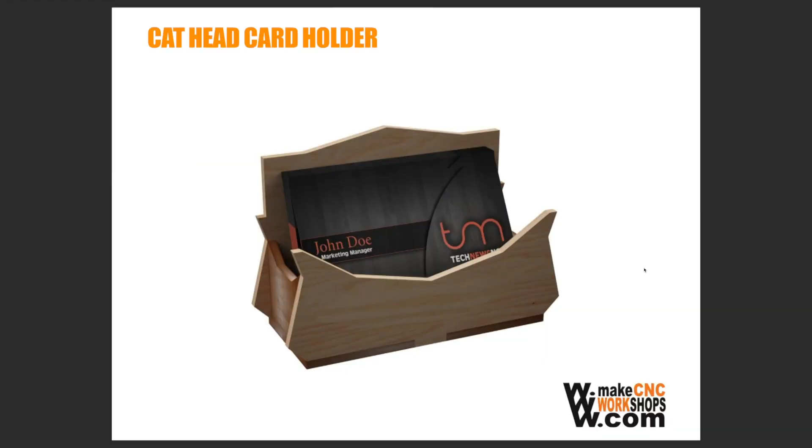Today I wanted to go over how to create the MakeCNC.com cat head business card holder. We've done a tutorial on how to do this within Vectric software, such as Cut2D or VCarve Pro. But we haven't really delved into how to do so in Fusion 360, and that's what I wanted to cover today.

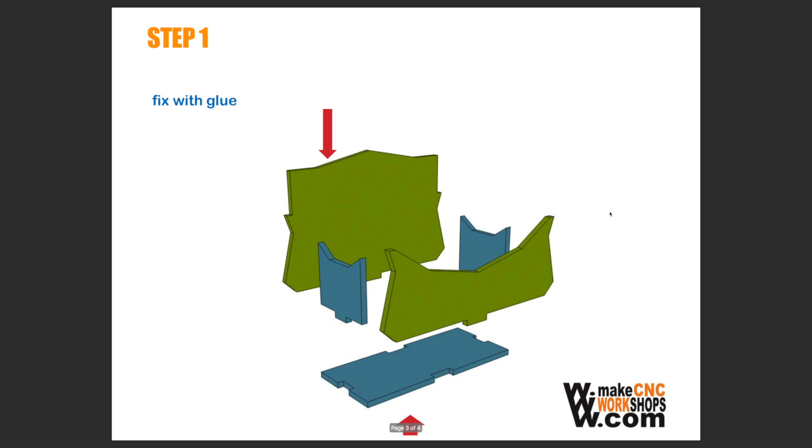This is the PDF that comes with the project itself, and you can download it in a .dxf format, which is what we'll be using. So you can see here we have the parts list, the instructions, and what the final project will look like.

Now before we dive right into our CAM, I just wanted to quickly cover the inside corners. These are 90-degree angles. Now that's an issue because if you've used a CNC machine before, you realize that all the tooling is round. And the solution to that is what we like to call Dogbone fillets. Dogbone fillets, because of how they're recessed into the piece, allow for a perfect edge-to-edge fit, whereas a normal fillet would leave a curved radius.

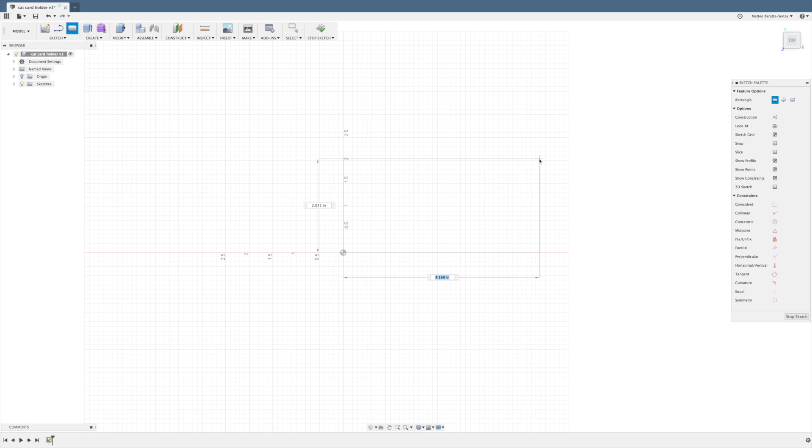So let's begin our file creation in Fusion 360. Now we want to begin by actually making the dimensions of the stock we're going to be using. And we can do that by creating a sketch, selecting our plane. We've moved to our top face. And I like to use a little shortcut. You can hit S and you have all your shortcuts here. I like to use a 2-point rectangle. This allows me to start with the bottom left corner at the very center of our coordinates.

So we can move out. We want it to be 12 inches in length by 6 inches in height. Now I actually made this 8 inches. I wanted to give myself an inch on each side for the clamp hold downs that come with our D-series machines. They're a great work holding solution. They allow you to do a lot of stuff right out of the box, and I wanted to incorporate them into this project. So I gave an extra inch on each side so that there'd be enough room for the tool to cut its project out. So once we have our dimensions, here's our stock.

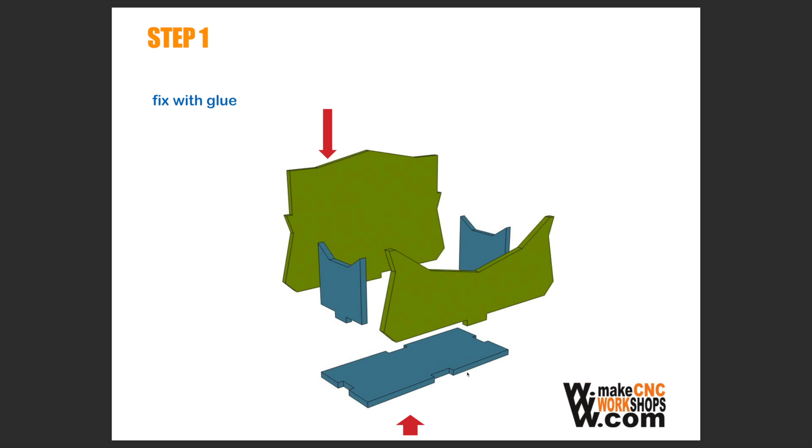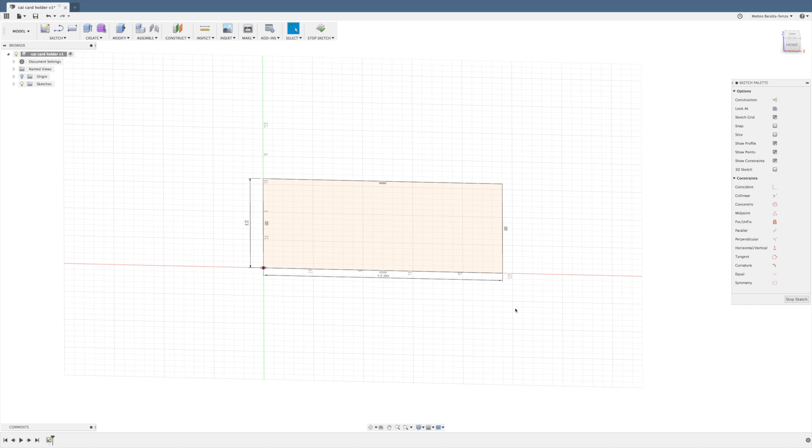Now there's something very important to remember when you are creating a project like this, where this piece is vertical and it slips into this little notch which is horizontal. The thickness of your stock is going to dictate how well this piece and this piece fit together. So it's very important to measure your stock. Now, if we take a pair of calipers to our stock, the example piece that I'm using is, instead of an 1/8 inch, 0.125, it is 0.124 inches thick, meaning I'm going to have to scale my project to the correct dimensions so that everything interlocks.

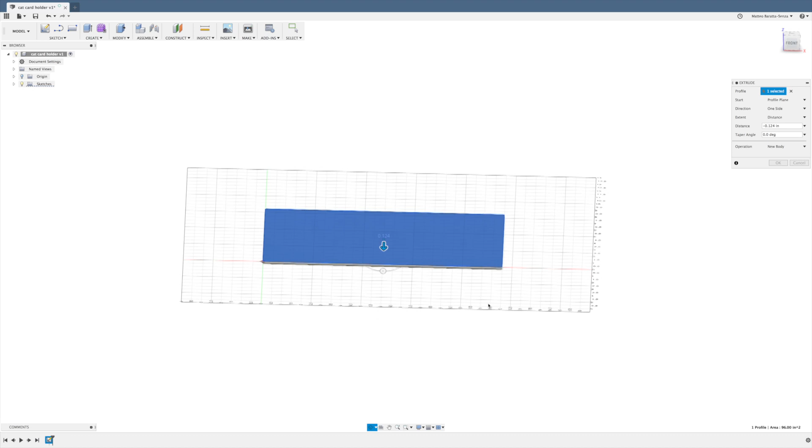To do so, I'm going to start by fully modeling my stock, and I can do that by hitting E or selecting Extrude up here, and I'm simply going to extrude it down the thickness of my stock, so 0.124. And I extrude it down so that it's easy to place my DXF file right on top. Hit enter, and as you can see, we've now created our stock. So this is essentially the material that you'd put in the machine.

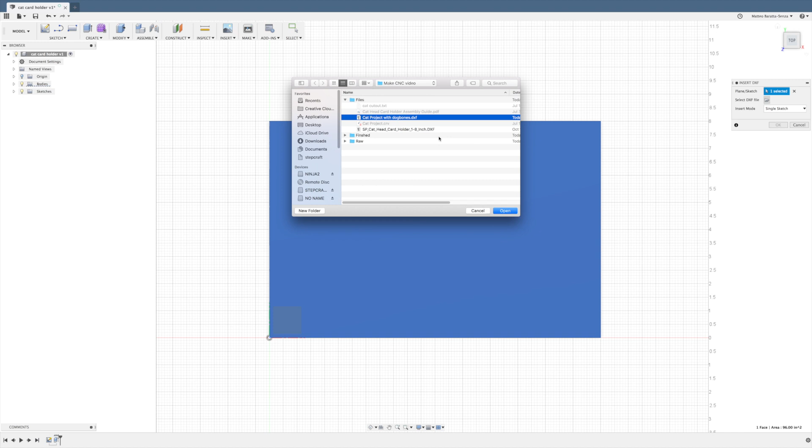Once we have our stock, we can move to our top view and select Insert, and we want to insert our DXF. Now, this DXF file that we're using for Fusion is a little bit different than the normal DXF that you would use with Vectric. As you can see, it says with dog bones, and I'll cover that in one second. So if we open that sketch, just importing, and there we go. So now we have our sketch right here, and we can actually move it around.

I'm just going to move it about an inch off the bottom, so it's sort of centered between those two pieces where I want to have that work holding. We can move it over a little bit more. That way we can almost get two projects out of this one piece of stock, which is really handy. This has been moved around so that the space is saved.

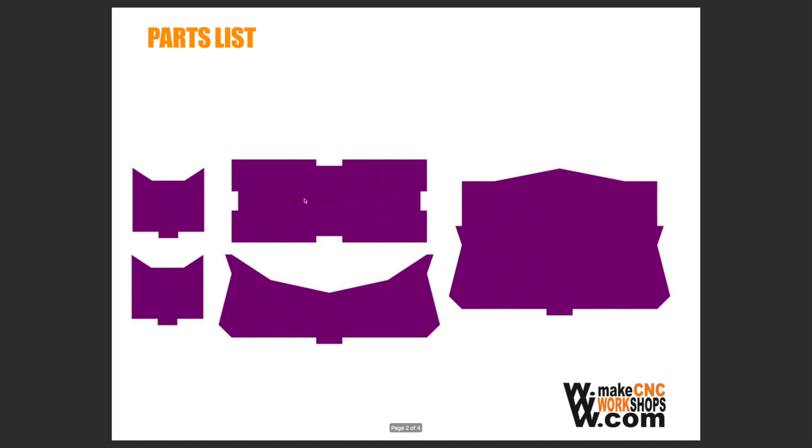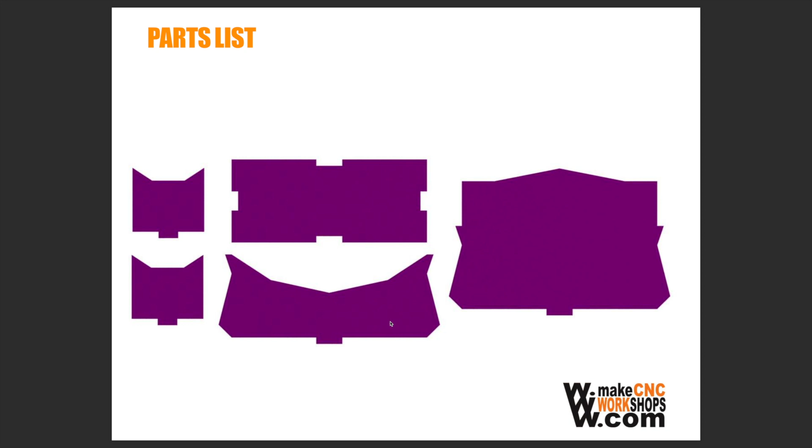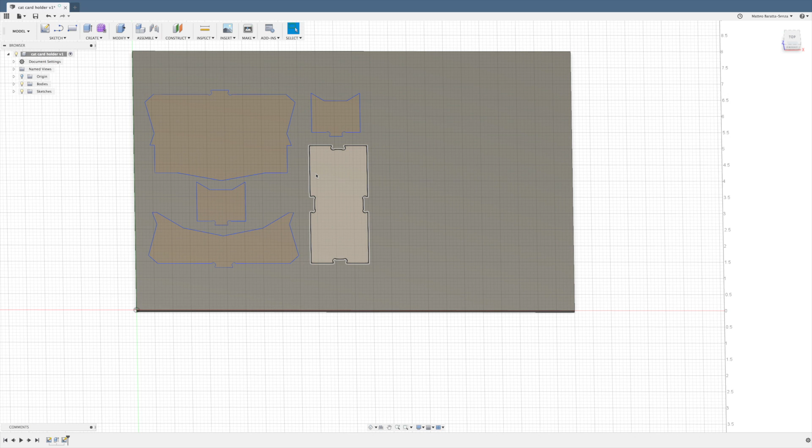You can see here in our preview, this is how the DXF imports by default when you download it from makecnc.com. And this is just fine if you have expendable stock, but by rearranging these, as long as there is a 1/8 inch distance between each piece, you can save a lot of room, as we see here. So now that this DXF is inserted, we can hit OK, and our DXF is inserted right on top of our stock there. So we have enough room there for our clamps.

Now, I wanted to quickly touch on what Dogbone fillets are. In Fusion, you are unable to create Dogbone fillets without an extension or without hand drawing them yourself, both of which defeat the purpose of an easy first project tutorial.

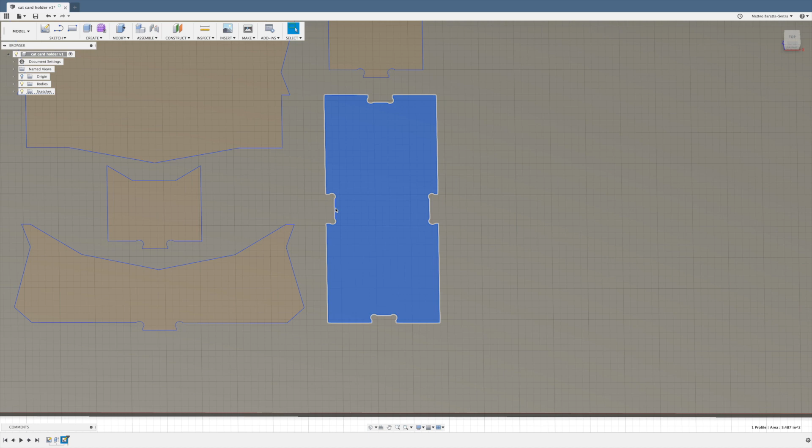So what I did was I took my DXF file from Vectric with the Dogbone fillets already made and imported it back into Fusion. We offer this modified DXF file for those of you who are using Fusion 360 to create their project. Now, before we continue, I just wanted to explain something briefly.

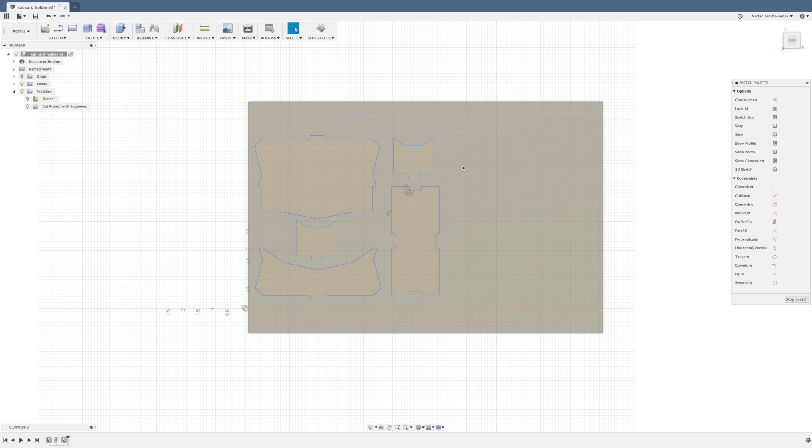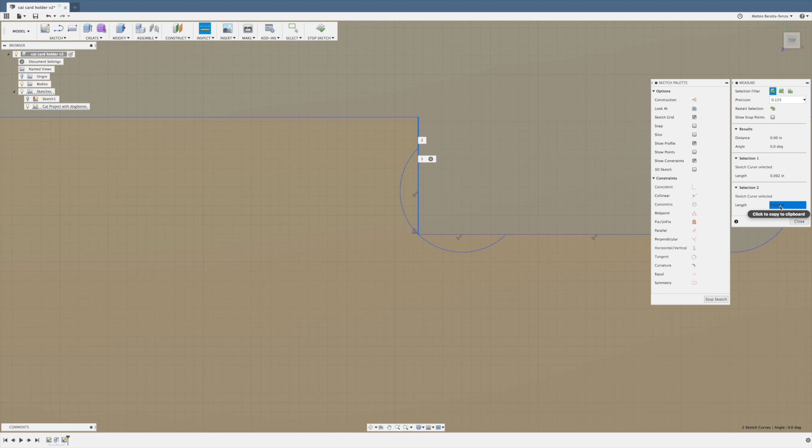If you look here, I've created this line here, as it's important to understand why we would scale a project. So if I hit I, which is inspect, and I select this line, and then I select this one, these two lines, 92 plus 33 is 125. So we can see that this length is 1/8 of an inch. It's exactly where that 90-degree angle would be without the Dogbone fillet.

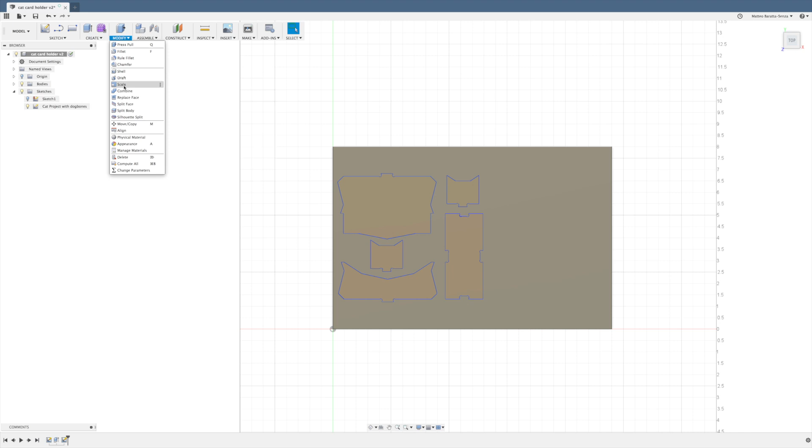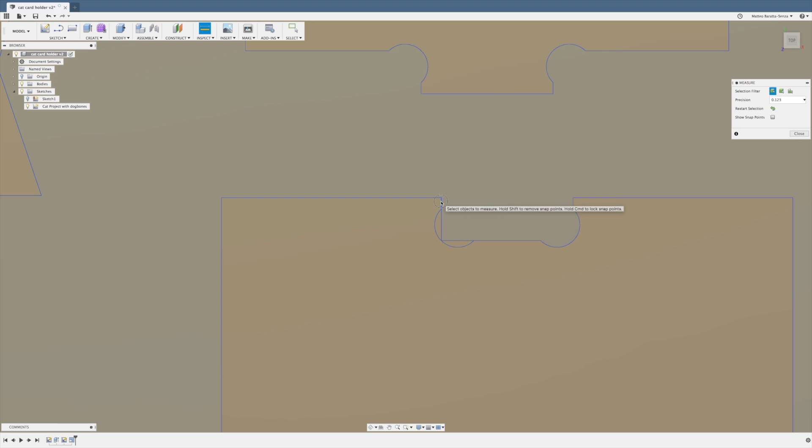So we can go ahead and scale our drawing. So select scale, and then the entities that we want to select, and we change that to 0.992. Now, if we go back to this little example that I showed and hit I and inspect these two pieces, you can see there is a 1 thou difference now, which means it would be 0.124. So now the project is scaled correctly.

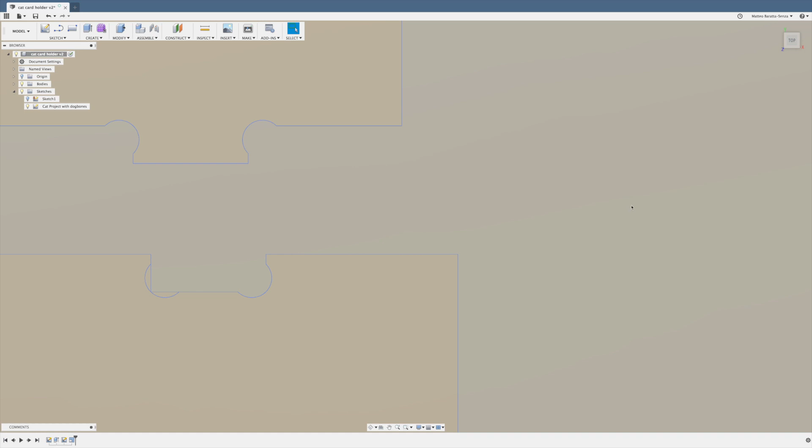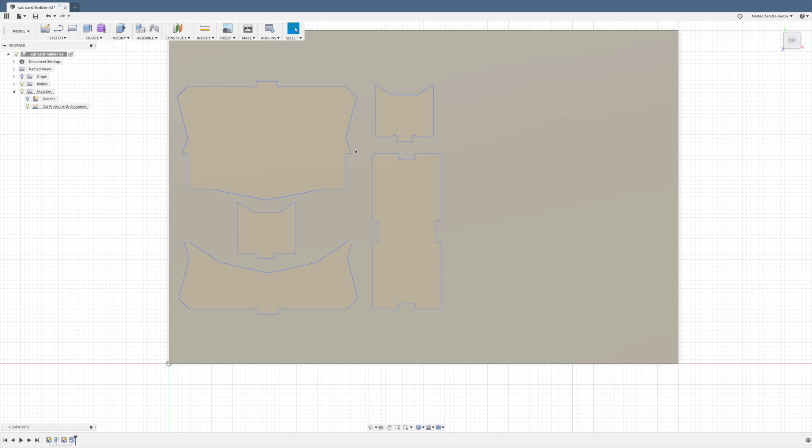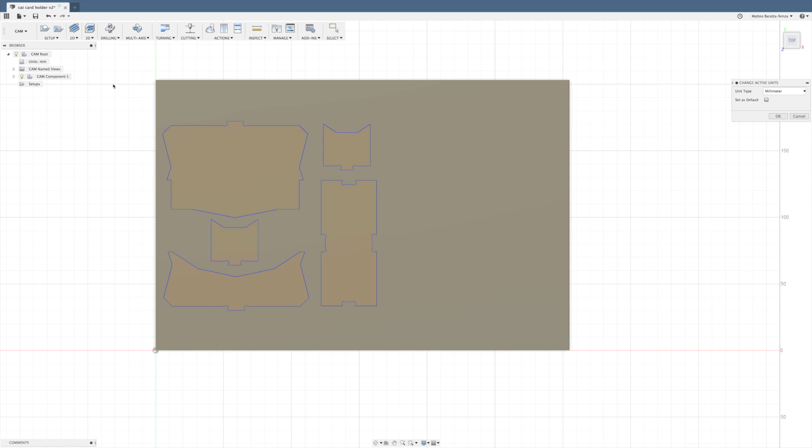In our case, our stock is pretty close. So I'm just going to clean these up really quick. There we go. So now that our project has been scaled, we are ready to run our toolpath. So to do so, we can move over to our CAM environment. Now we're in our CAM environment, and I actually want to change my unit type to inches. There we are. And we can do our setup.

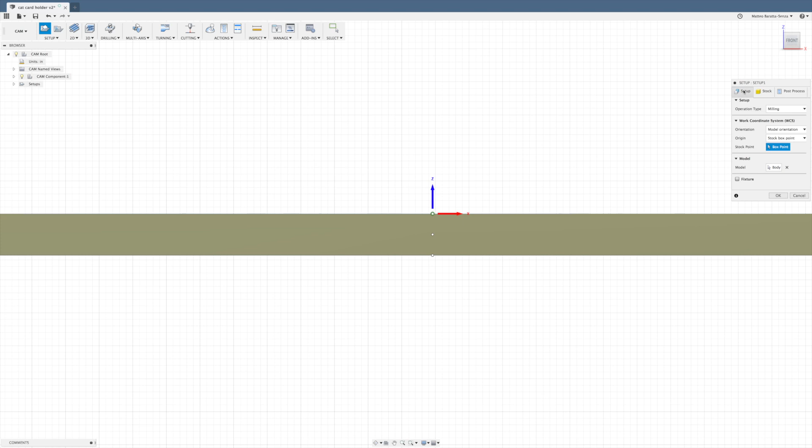So here's our setup. We have our X, our Y, and our Z. Now I like to start at the front and make sure that it's starting at the model. We have some stock, which I want to change. I do not want any additional stock. So I want our start point to be right at the top of the work. Now our setup, I want to do something a little bit different this time. I actually want our stock point to be the top.

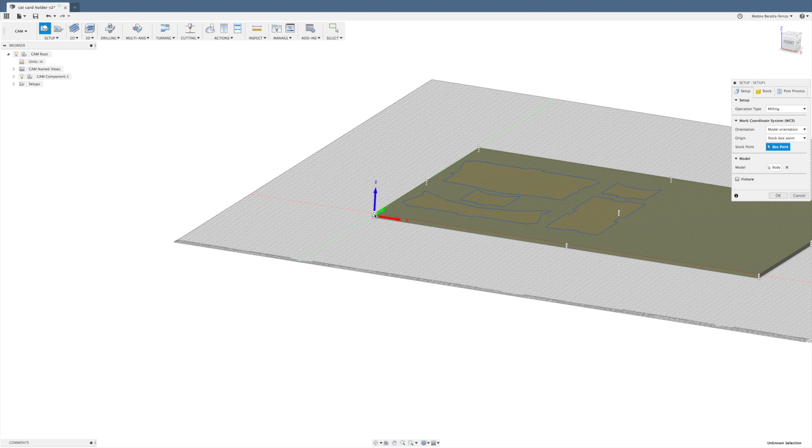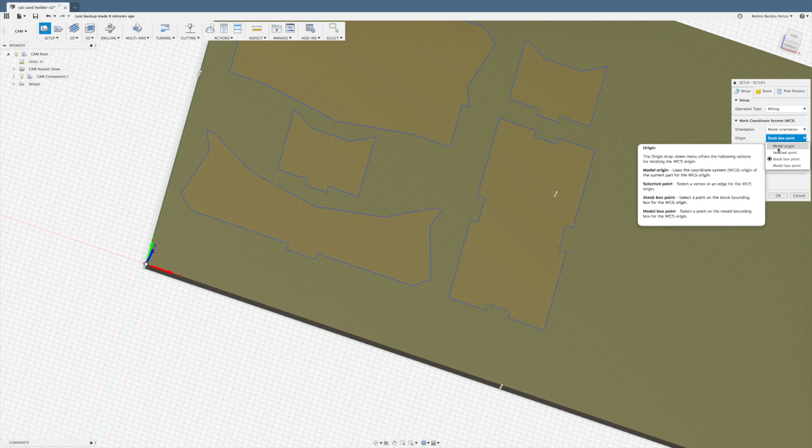There we go. So our starting position is actually at the very corner of our workpiece, right where the drawing begins. And you know what I'm actually going to do? I'm going to move that up here. And I did that just by selecting origin, selected point, and then selecting this line.

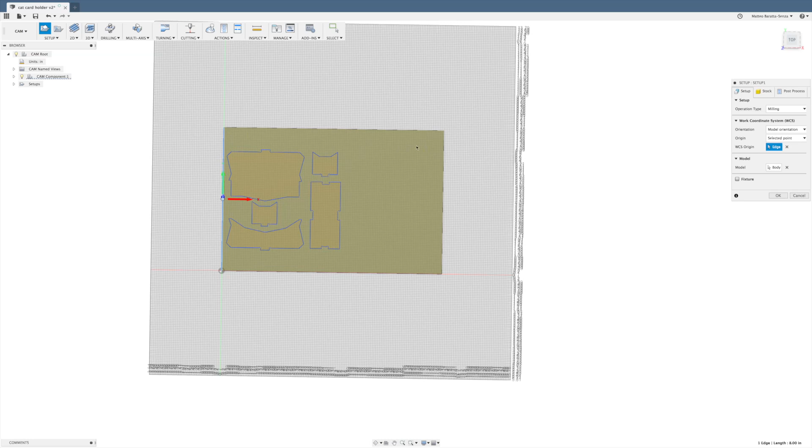And I did that because I gave that extra inch on each side for the clamping bars. And if my spindle were to start here, it would actually run into my work holding. So being conscious of your work holding when creating CAM is very important. So now our setup is complete. We can see our height in Z. That's the correct width. And we can hit OK. And our setup is done.

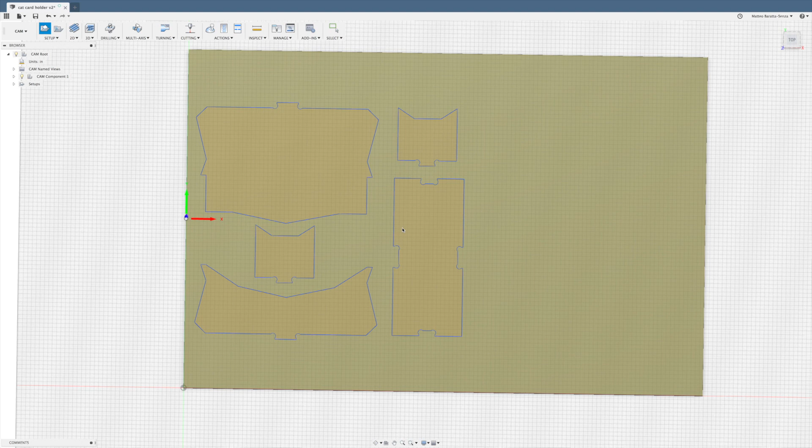So once we have our setup, we can move into doing our toolpath. So we're going to do a simple 2D contour. Select that. And now we can set up our tooling. So we select our tool. And this is one that I've created specifically for this project based on the actual tool I'll be running. Now, to create your own, simply select this icon and select the type of end mill you have and the number of flutes, and then fill out this information as applicable.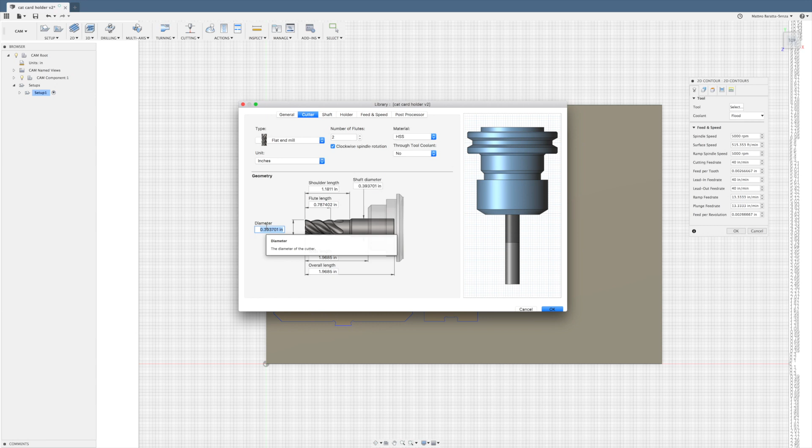Sometimes you'll have a different tool for different projects. Of course, you can build a tool library based on the tools you own personally, but these vary. The only thing that's going to be the same for everyone watching this video is the diameter, which is 1/8 of an inch. So I have this 1/8 inch end mill that I've created here, and I can select OK. You'll see it's loaded up in there.

Now, the main things that we're going to worry about is our feed rate and our spindle speed. Now, spindle speed you don't have to worry about if you have an MM1000 or a Crest spindle, something that isn't electronically controlled. If you have an HF500 and you're interfacing it with CNC to control the RPMs through the software, that's something that you'd set here, and you could set that at 12,000. Personally, I will be using an MM1000, so this is not important to me.

For those of you who are using an MM, I found the optimal setting is around 4 on the dial. Now, our cutting feed rate is going to be 26.322, and that is in inches per minute. That is about 10 millimeters per second. Now, feed per tooth is fine as it is. Our lead in and lead out feed rates, we want to keep the same. So we can actually take this value, copy, and just paste that in.

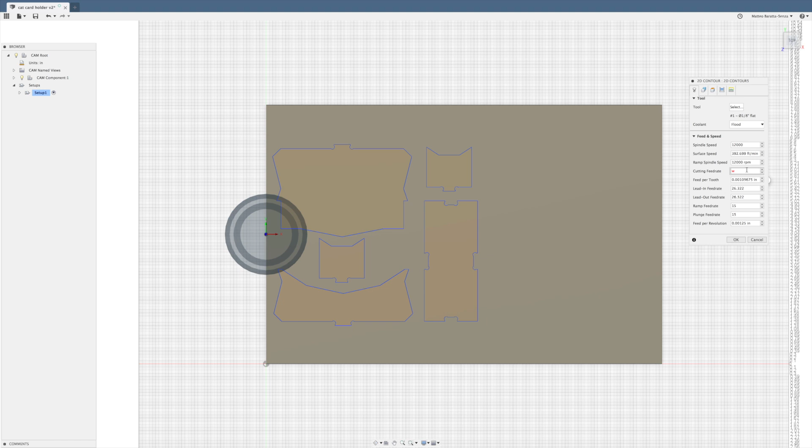Now we can move on to our geometry. So we simply select the contours that we want the bit to cut out, and then these little arrows, we actually want them on the outside of the line, as that means the bit is cutting up against the outside line as opposed to on it or inside. You'd use inside for a pocket operation. There we go. Now we want to set up some tabs.

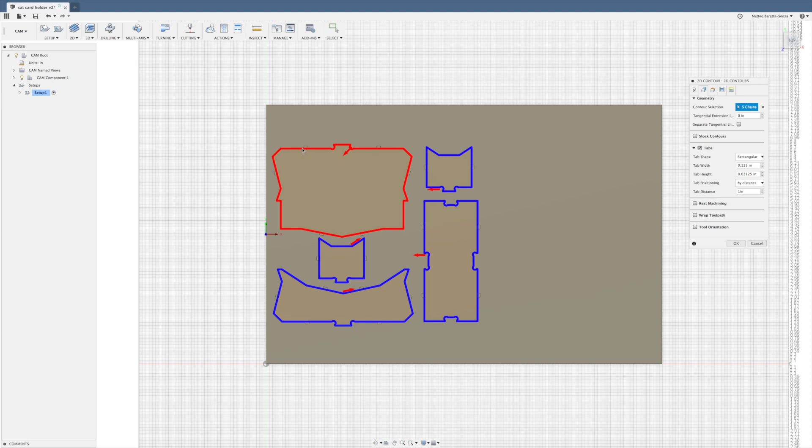Now I know this looks strange when it looks like it's inside. It's not, and you can tell that by the location of the tabs. If these were on the inside, it would be cutting the inside line. That's a nice way to check if your arrows are correct, because sometimes in situations like this, it's kind of hard to tell where it's actually cutting. It's indicating that the tool is going to travel this way and into the piece and then back out. But that's hard to tell from that view.

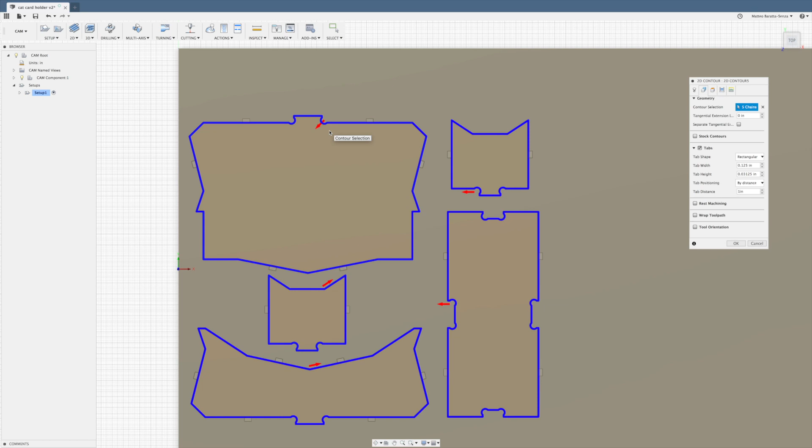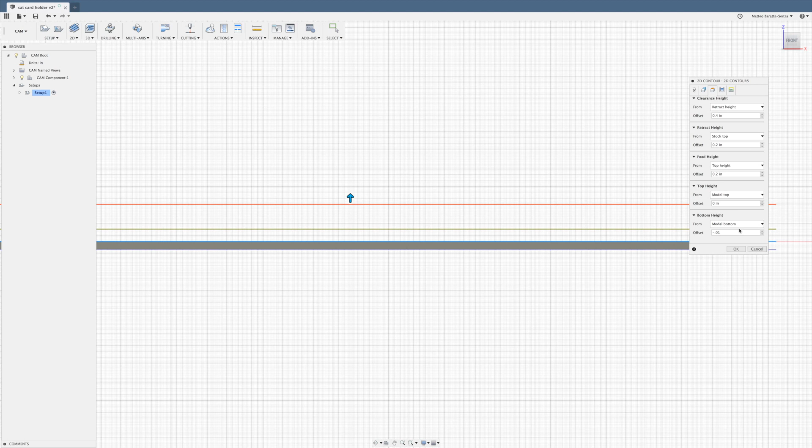So now that our tabs are set up, we can go to our heights. Now we are in the top view, but we can actually move to the front, so it's pretty easy to visualize. My top height, I want to start at the model top, and the bottom height, I want to be the model bottom. I want to give the bottom height a negative 10 thou offset, which allows the spindle to pass all the way through the piece. When doing this, just make sure you have a sacrificial board underneath, because you don't want to damage the bed of your machine as the tool is passing all the way through. Everything else should be fine.

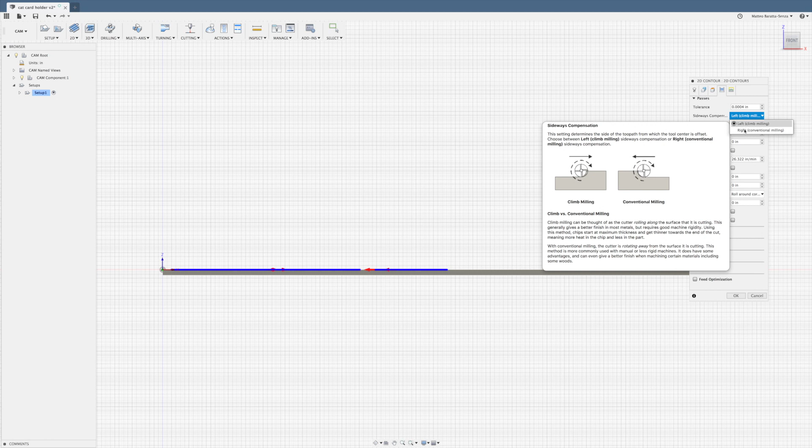Now we can go to passes. Our sideways compensation should be on conventional. Everything is fine. We don't need to do any finishing passes or anything fancy like that. We simply want to do multiple depths, and our step down should be half the diameter of our bit, so that's 0.0625. We don't need a finishing step down. Everything else is just fine the way it is.

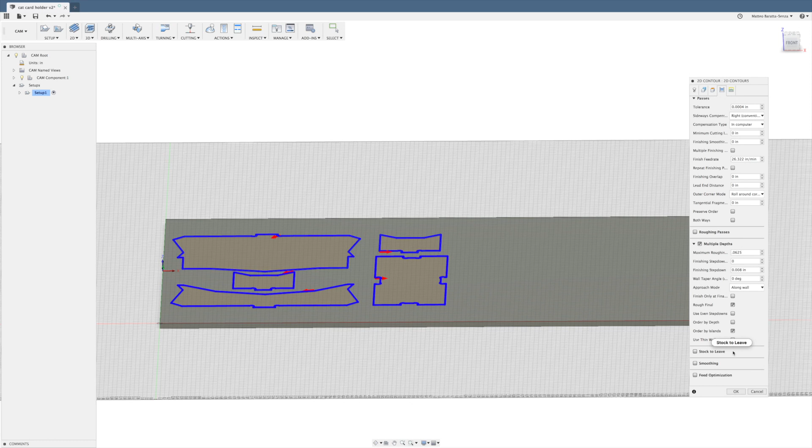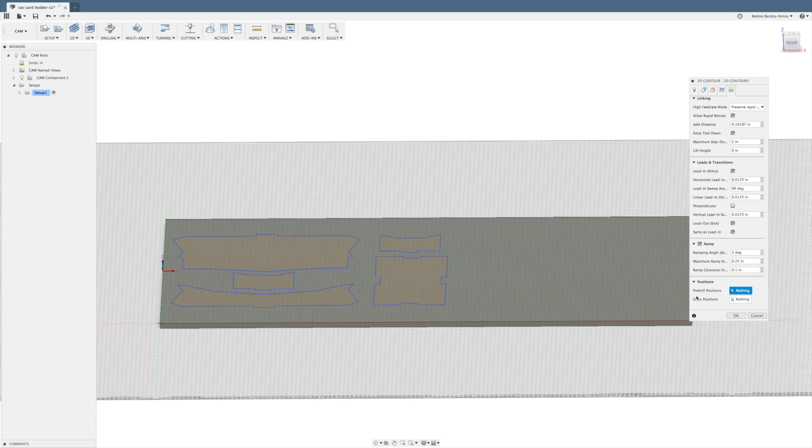We can go to linking. We want to preserve rapid movement, allow rapid retract. We can keep the tool down as much as possible. And for our lead-ins and transitions, we can keep it as is. We can add a ramp, and this is useful because instead of just plunging directly in, it will do a sort of ramp in, and that puts less stress on the tool and on the machine. So once we've done all that, we can hit OK, and it's going to render our toolpath.

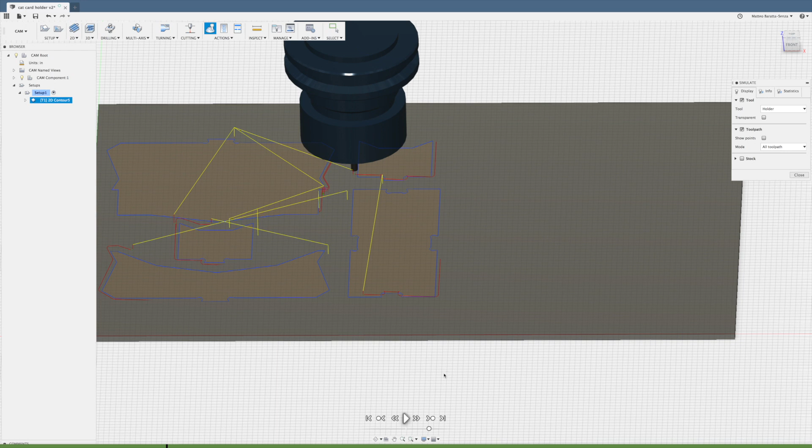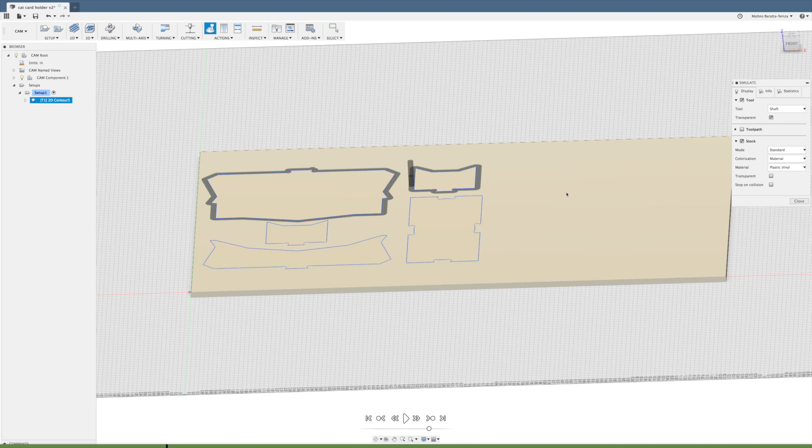So now that this is all rendered, we can actually simulate and see how that works. Now when I do a simulation, I like to make my tool transparent and just show the shaft of the tool. I like to turn my toolpath off, and I actually like to turn my stock on and to plastic vinyl. It helps kind of visualize the cutting operation here. And lastly, I like to turn my CAM component off, as you get to see the actual workpiece as opposed to your model showing through as you cut.

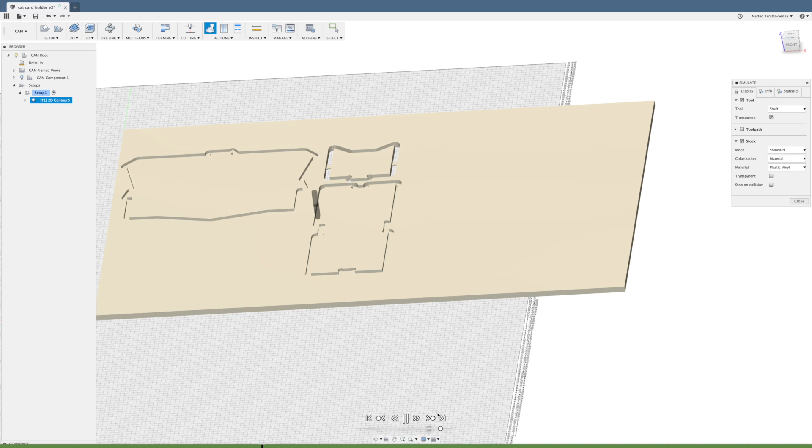Run that simulation. We can speed it up if we want to, make it a little easier to see. You can see it's cutting those tabs. On that last pass, it's keeping that material there. And it's all done. Now that we're all done with our toolpath and we've simulated it and everything is to our liking, we can do our post-process.

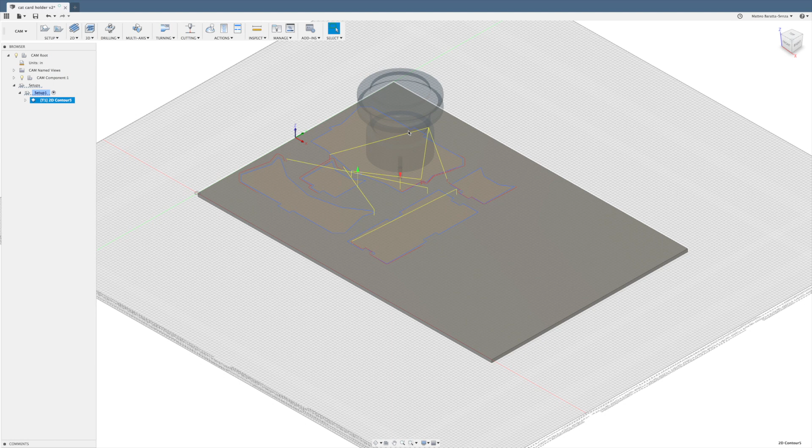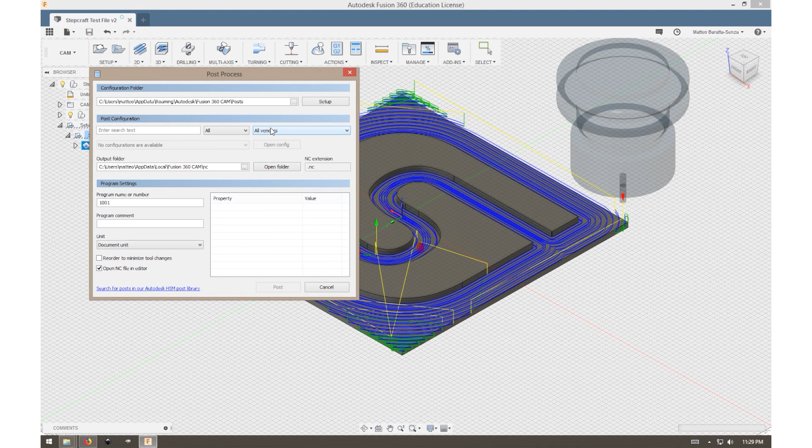Now to make this process a little bit simpler, we can go back to Fusion 360, and in our post-process, we can select Setup and use a personal post-process. This will allow us to copy this file location and paste it into the download, allowing that .cps file to go directly into our personal post-processor folder. Now, it will not appear by default. You'll actually want to cancel your post-process and reselect it. Then go to Setup and Personal Post Library, and we should have our STEPCRAFT post processor appear by default.

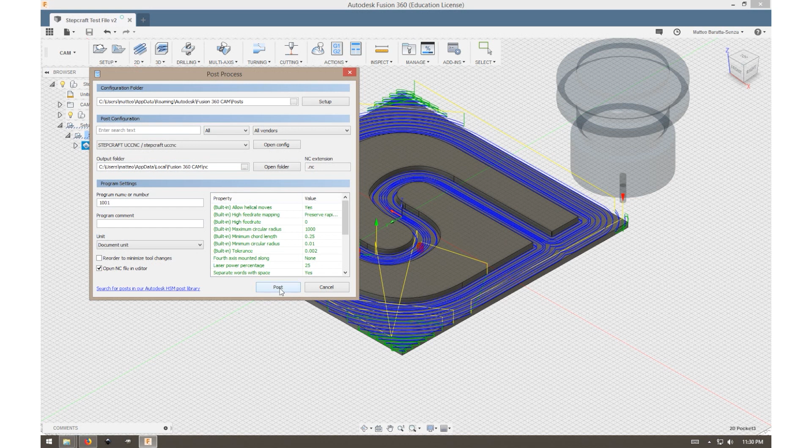Once that's all set, we can select Post, and it will prompt us for a file location. I'll call my file STEPCRAFT test file and save it to my desktop. This file will save as a .nc file. Simply load the .nc file into UCCNC and you're ready to run your project.